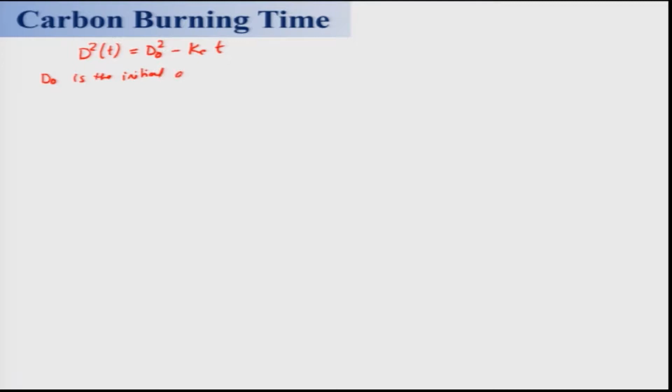last lecture. We basically looked at the carbon burning rate. In the process, we derived a relationship for how the diameter of a carbon particle varies with respect to time. What we had derived is basically d square T is equal to d naught square minus Kc T, where d naught is the initial diameter of the carbon particle, and Kc is a constant.

We had derived that Kc is basically 8 rho g d12 by rho c ln(Bc plus 1). Keep in mind that rho g is the density of the gas, rho c is the density of carbon, d12 is the diffusivity between the carbon and the oxygen, and Bc is your mass transfer number. Sometimes people call it the Spalding number.

And let us look at how this d square varies with time. Keep in mind that this relationship is known as the d square law for a carbon sphere, and it is also similar for any liquid droplet sphere. If you recall, we had derived a similar relationship earlier, only Kc will be different, but the form is similar.

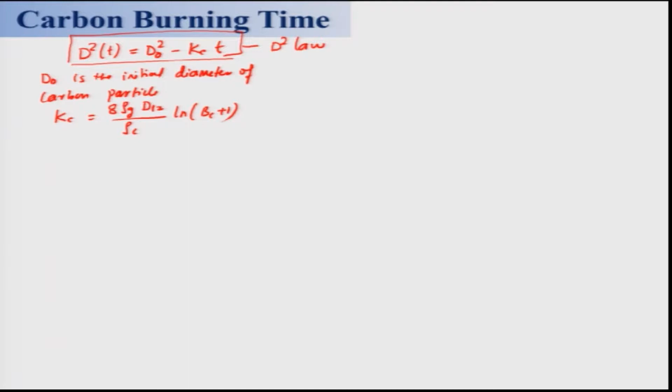And when we plot d square versus time, you will see that this is your initial droplet diameter square. This is this one, and as time progresses, it reduces linearly, and the slope from the d square law will be 8 rho g d12 divided by rho c, times ln(Bc plus 1).

And keep in mind that when the droplet diameter becomes 0, the time duration for complete combustion of the carbon sphere is known as Tb, that is the carbon sphere lifetime, because this is the time required for complete burning of the carbon sphere. This can be different depending on various properties like rho g, Bc and other things.

We know that Bc is equal to F into YO, the oxidizer mass fraction, and the mass fraction of oxidizer can be 1 if it is an oxygen atmosphere. If it is air, it will be 0.232, and if it is varying, then it will be different. F is basically your fuel and oxidizer ratio.

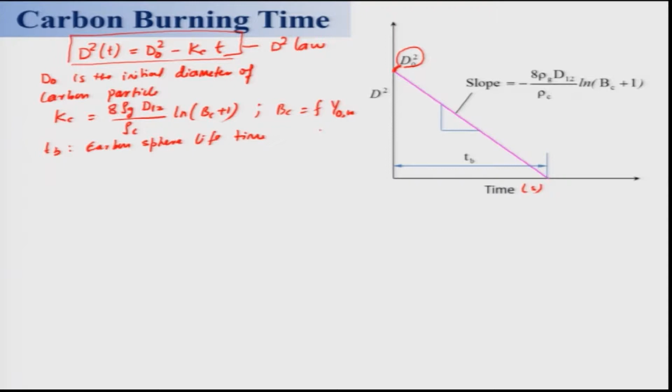So, note that this d square law will be valid not only for the carbon sphere, but also for other fuel particles and metal particles. The only thing is that properties will change, and so also other parameters like diffusivity, but the law will remain the same.

And let us look at some data which I have considered in this table. If you look at aluminum, the density is given here in gram per centimeter cube, and Tb is calculated. In oxygen atmosphere it is 0.9, because the B oxygen has different values, and in air it is 0.26. It takes more time in an air atmosphere, and if only oxygen is there, the time required for complete burning of the aluminum sphere is reduced.

And boron, of course, is a little higher, even for oxygen 1.57 10 power minus 5 second. This unit is in seconds. If the surrounding is air, the time is 6.15 10 power minus 5 second. And the measured value is much lower, 2.03 10 power minus 5 for air atmosphere. This is your measured value. The question arises why it is so.

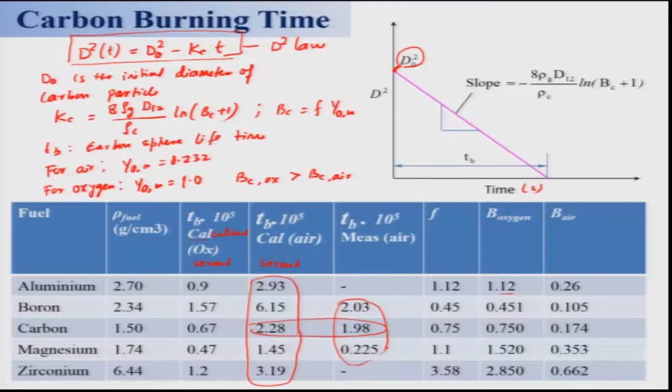And of course, we have made a lot of other assumptions, like there is no radiation, it is one-dimensional in nature, and several other things that also contribute to the lower values of the measured lifetime of any fuel sphere. So now, if you look at solid fuel burning, consider carbon here. This is the burning lifetime, and this is the initial diameter, in mm, with tB in seconds. You will find carbon is on the upper portion, and this is kerosene, and D naught is the initial fuel sphere diameter.

Now, if you look at this curve, you can see that for a particular initial fuel sphere, comparing carbon and kerosene, carbon has higher tB values. That means more time is required for burning carbon of the same initial diameter as compared to a kerosene droplet of the same initial size. Why is it so? That question might be coming to your mind.

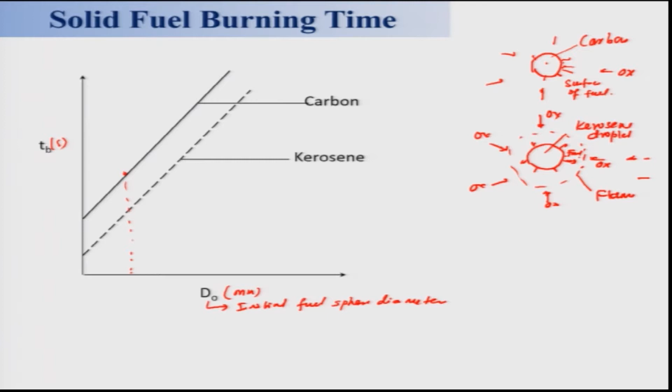And if you look at coal, which undergoes pyrolyzing combustion, let us say this is the coal particle to start with, and this will be char. All these gases are released due to devolatilization; volatile gases are released, and then the flame will be formed, because oxygen will be coming from the atmosphere and then the flame is formed.

So for coal, this curve will be somewhere in between, corresponding to the coal particle, because coal particle combustion will be similar to kerosene: the volatilized or pyrolyzed gas from the coal will go away from the carbon surface to meet the oxygen and form a gas phase flame. This is a gaseous flame, or gas phase flame.

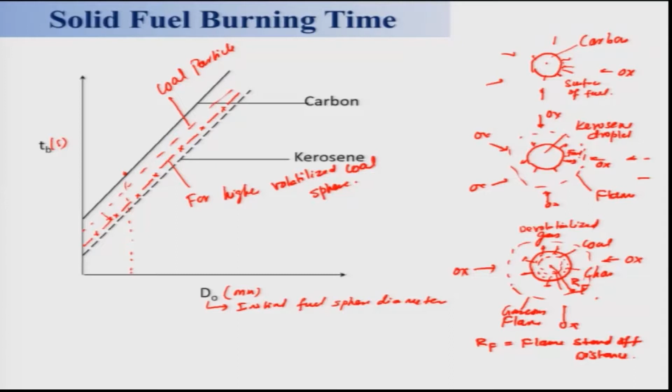So, that is what I would like to say we can find out from that. Why do we need to find out the lifetime of a solid fuel particle or sphere? Because when we are designing combustors, of course, various particle sizes will be there, but we can take a representative particle size and find out the lifetime of a solid sphere, such that the length of the combustor can be determined.

In other words, you will have to give enough length of the combustor such that all the fuel particles will be burnt out before being exhausted out of the combustor. So, that is the reason why this lifetime estimation of a carbon particle or coal particle or any other fuel particle is essential. So, we can use that and design it.

Now, we will be discussing the temperature profile, and we are considering carbon. Keep in mind that this is a non-pyrolyzing fuel particle, and for this purpose we will have to consider the energy equation. Keep in mind that oxygen will be coming from this side, and also from this side, as I have already explained. To find out the temperature profile, how the temperature varies in the radial direction from the fuel surface,

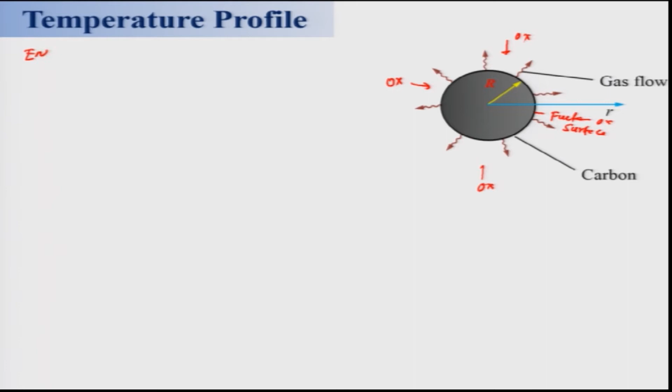we will have to invoke the energy equation which we had already derived, the energy conservation. Looking at the mass flux rate at the surface, I can write m dot r square Cp dT/dr, this is the convection term, is equal to Kg d/dr (r square dT/dr). Now, we will have to integrate this equation. If I say this is equation 1, by integrating equation 1, we can have

r square, and this is a constant mass flow rate. Cp is also constant, I can take it out, so m dot Cp T is equal to Kg, also constant, r square dT/dr plus a constant. Let us say this is equation 2. And what will we do? We will have to apply the boundary condition at the surface such that we can evaluate the constant C. So, at the fuel surface,

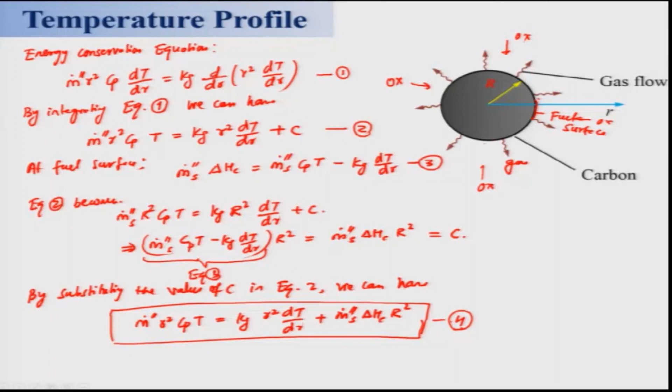And we will now integrate this equation, which we will do in the next lecture, and see what we get out of it.